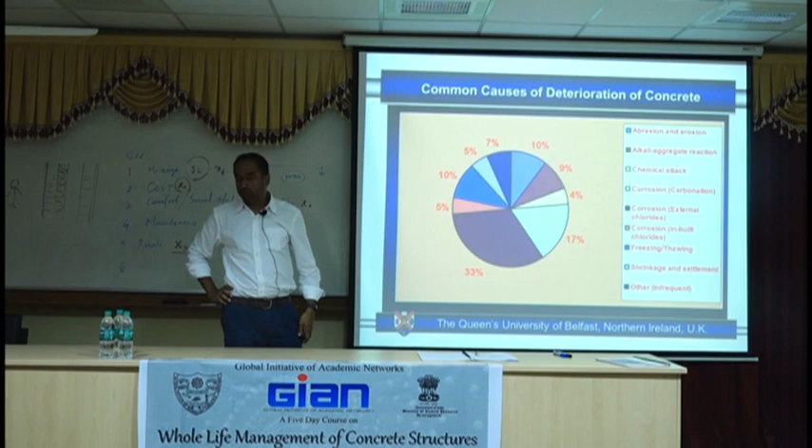Are you familiar that in the past calcium chloride was used as an inhibitor, as an accelerator? It's not an issue on its own, but it becomes an issue if you have water. If water comes in, then the equation will change.

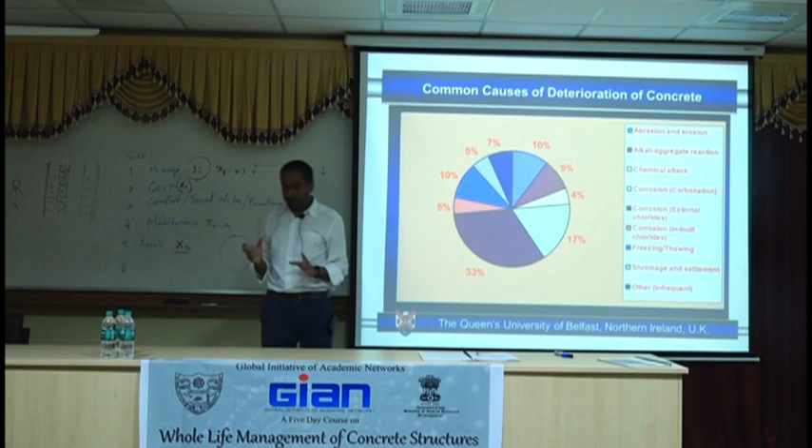And you have freeze thaw and all of the other shrinkage and material related properties. So this is for UK as a whole. Northern Ireland is a bit more straightforward.

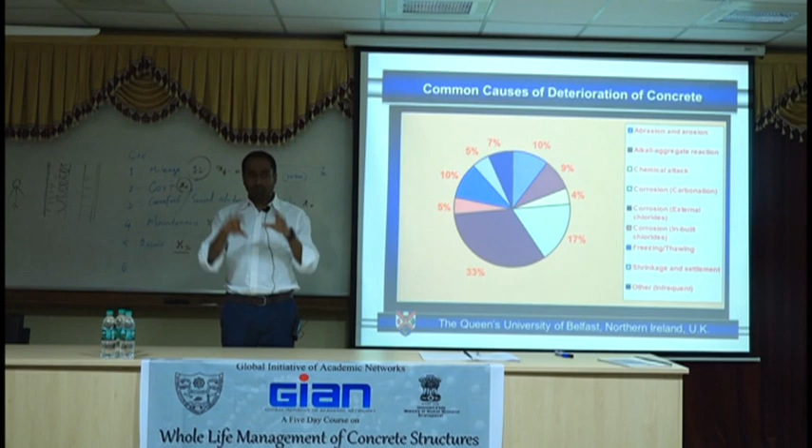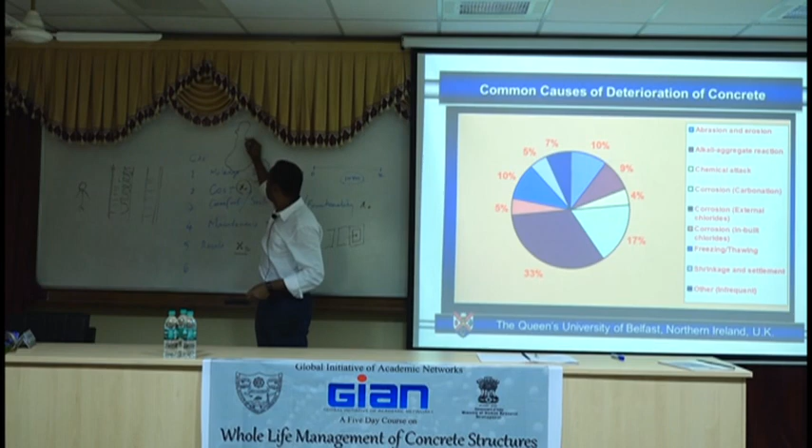We're the largest concrete producers in the UK. We make more concrete, 80% of the concrete. Have you seen Northern Ireland as a map? My map skills are... this is UK, that's Scotland, and this is Wales. So Ireland is about that size, and Northern Ireland is about that much. It's very small, actually much smaller than Scotland even.

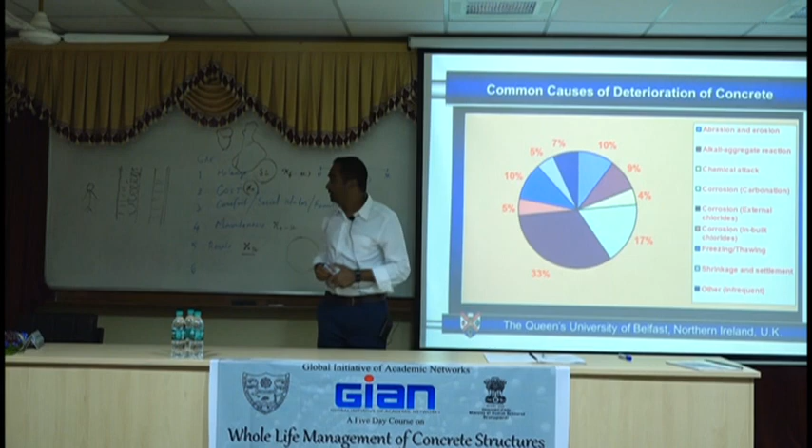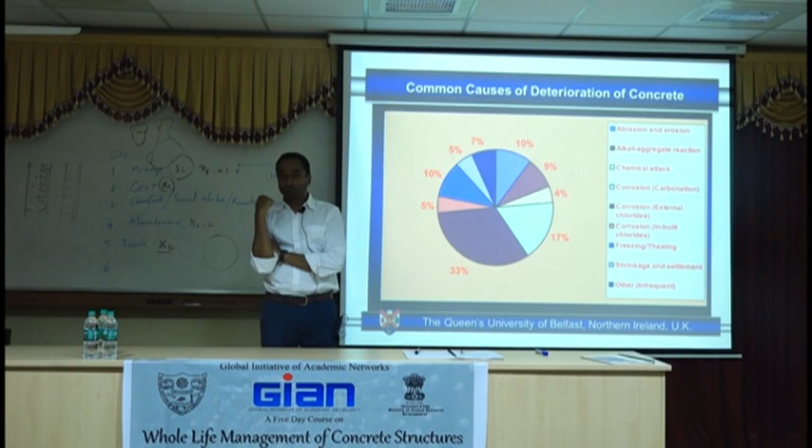For that island nation, we produce 80% of UK's concrete. We make it, we ship it across the UK, and it's still cheaper for us to deliver to London than somebody who lives 100 kilometers from London. That's a different economics, okay?

Part of the reason we make good concrete is we have very good quality aggregates. Most of the cement producers in Europe are based in Ireland. Most of the European cements are owned by Irish Cement Association. They control the market, which means we can produce a lot of cement.

So for Northern Ireland, the issue is different. Quality of aggregate and quality of construction means majority of our structures, 80% of our structures, chlorides are the only issue. Chlorides are really a big issue for us. So this course will look at chlorides and carbonation because I presume that's very common here.

Is carbonation a big issue here? It'll be a very big issue closer to the industrial zones or more industrialized cities. I'm sure it's an issue in Bangalore anyway.

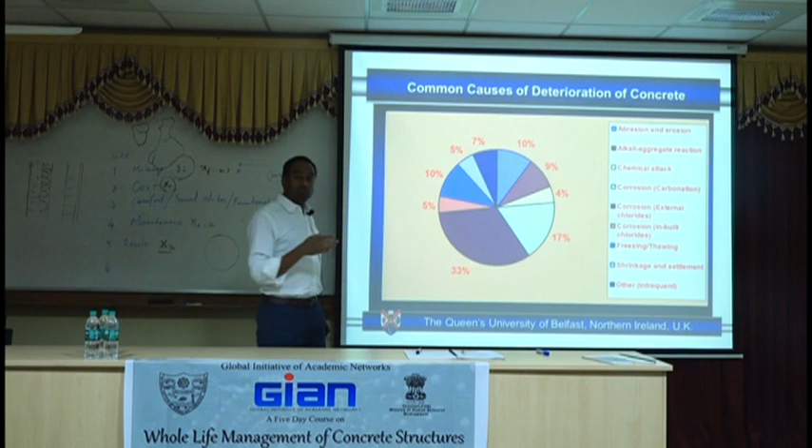So let's then focus more on carbonation and chlorides, because if you look at climate change, I think one of the primary things that will change is the CO2 concentration. And it has a direct effect on the structures. Some of it is good, some of it is not good, so we'll look at that.

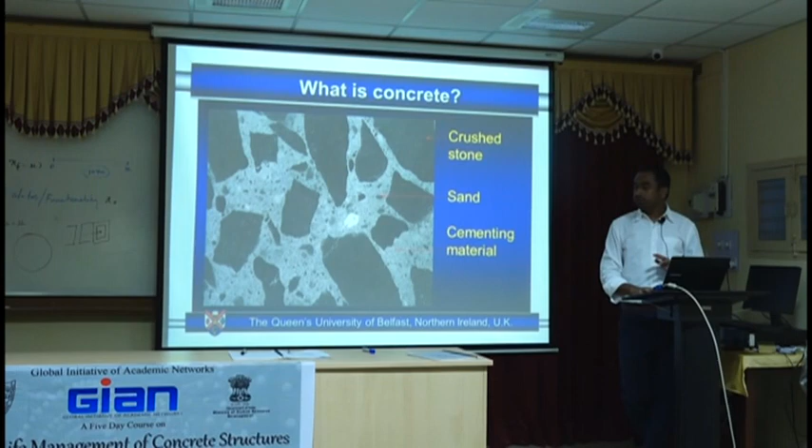So that gives you a breakdown of where we focus our effort. And I have some slides on the concrete. Given that most of you are quite familiar with concrete, I don't really need to spend much time, so I don't intend to.

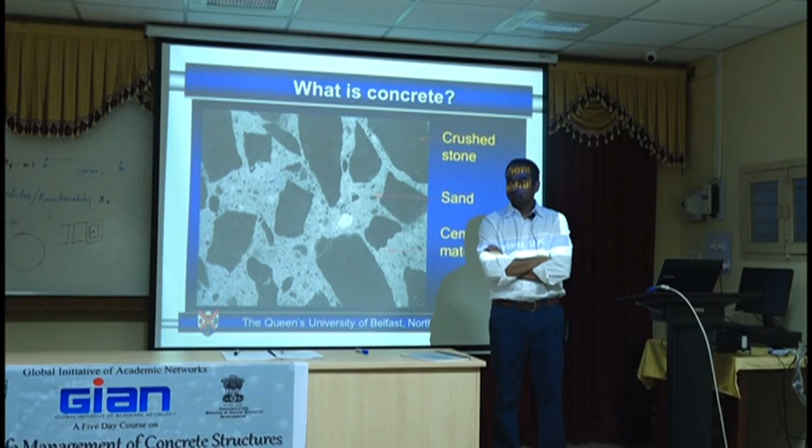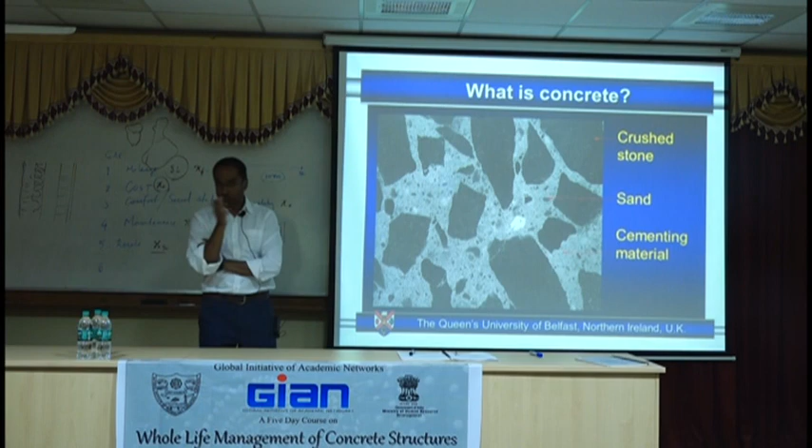Anybody can make concrete, am I right? Anybody can make concrete, all you need is a mixer, okay? And that's part of the problem, that everybody can make concrete. Cement is so hydraulic that you just add water to it and throw some stones. Concrete, it's not really difficult. It shouldn't be, it's an easy material. For a general purpose, concrete should be the case, but not for structural concrete, not for concrete that's designed to last.

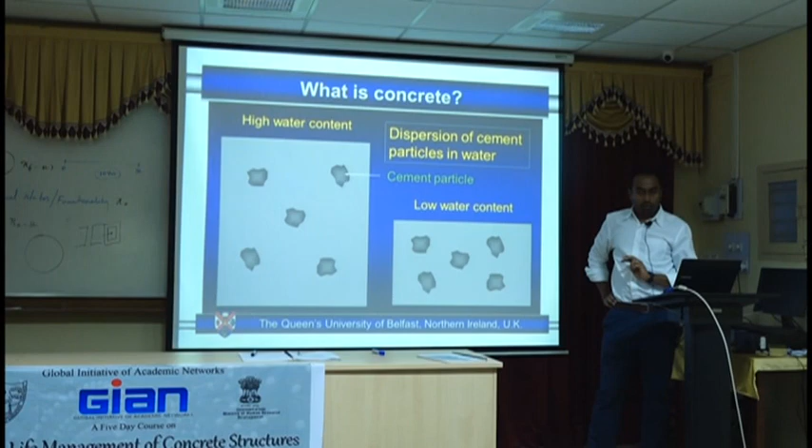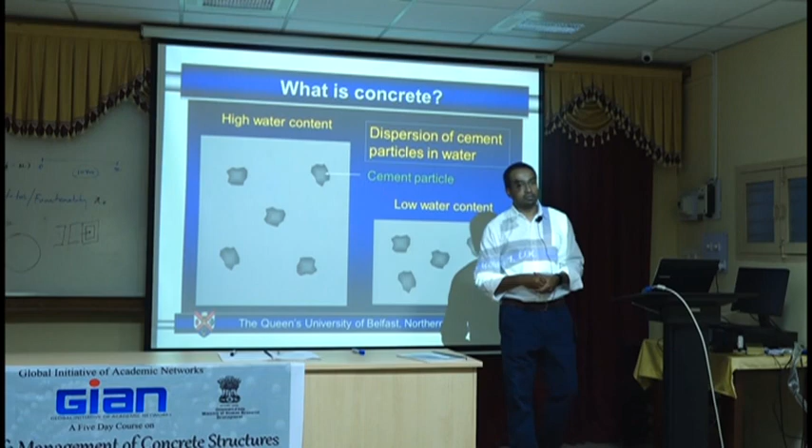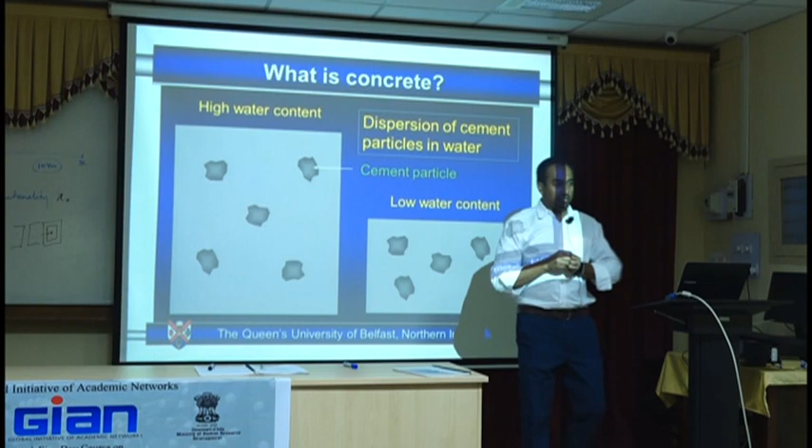Through this slide, what I'm trying to say is the effective water binder ratio. So if you have the same amount of cement particle in an area and you increase the water, i.e. you have a higher water binder ratio concrete, it disperses itself. That's the only way you can manage. These are charged particles. Cement is charged particles, which means they'll tend to disperse, which means the network will be very loose. So anything that's looking to come from outside, it's much easier for it to come from outside.

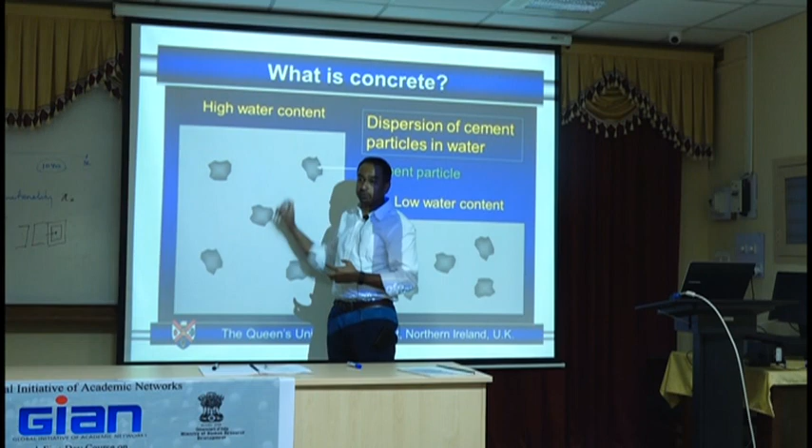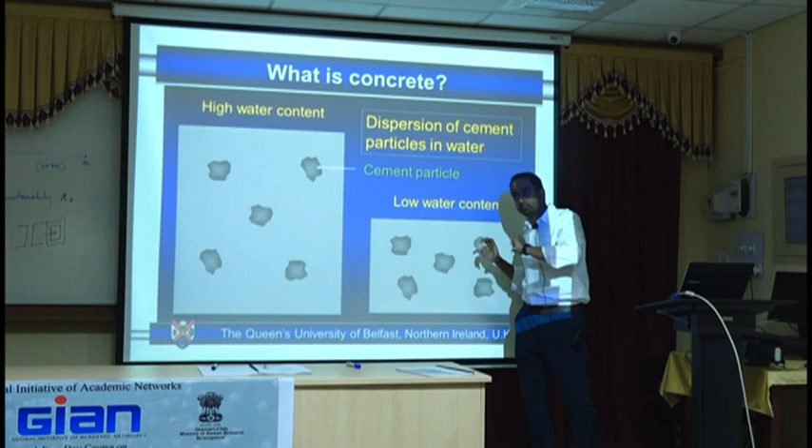Most of the things that are coming from outside, whether it's water, chlorides, carbon dioxide, sulfate, or whatever, they are charged particles. So the further apart the charged particles are, it's easier for them to come in. Closer the charged particles are, harder for them to come in. It's not just the gap, it's how much force these things can exert, whether that's chlorides or carbon dioxide. So it's a very simple equation.

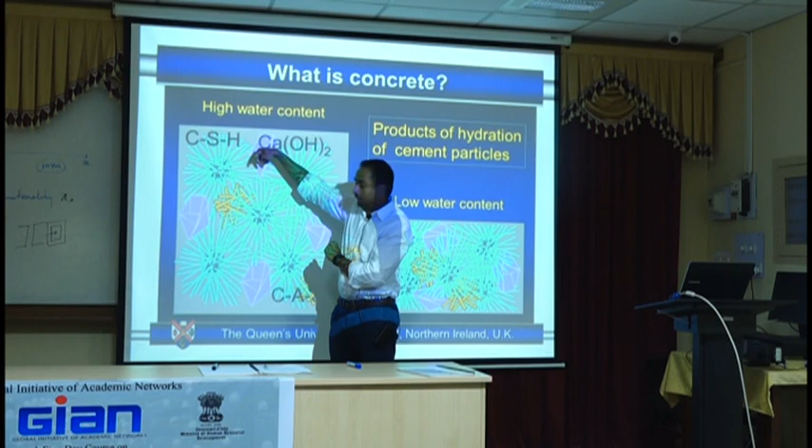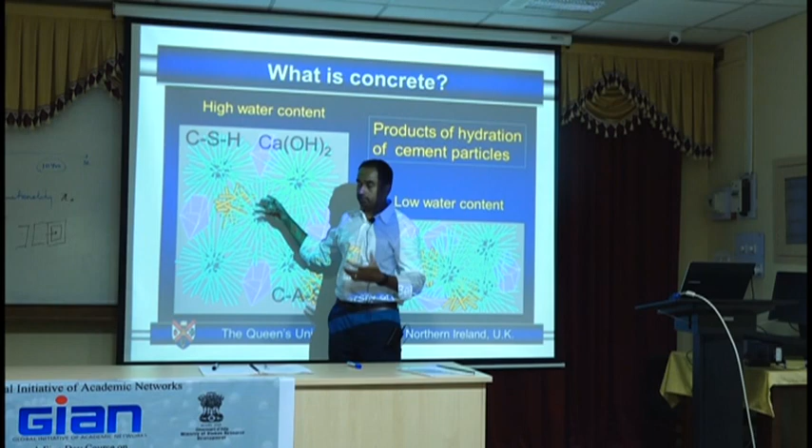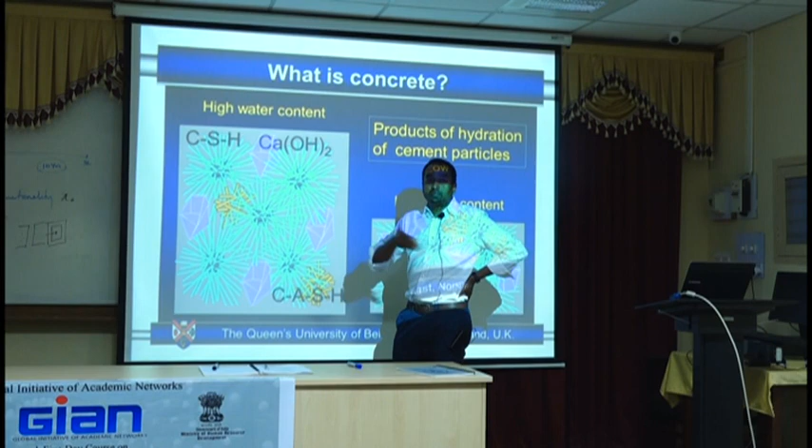This is why when you look at, I think even in the Indian standards, it's very strict on, am I right in saying the Indian standards are strict on water content or water binder ratio? For structural concrete, does it say the water binder ratio shall be less than a certain value? Okay, that's the reason why they're saying it.

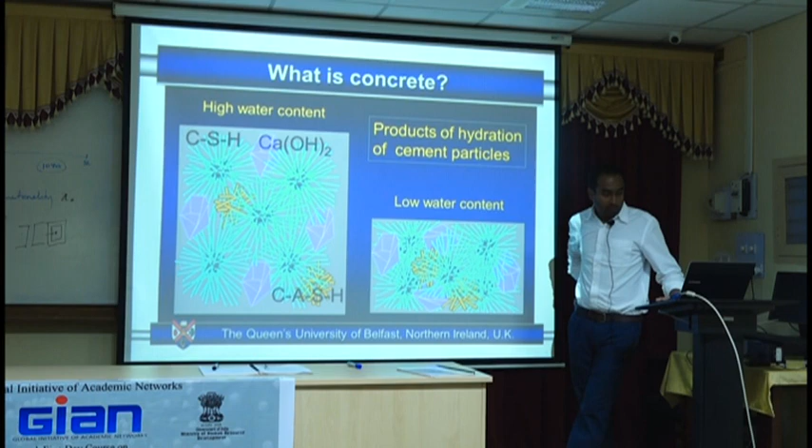So we're going to be battling with some of these guys later on. Calcium silicate hydrate, your structural part of cement. Calcium aluminate hydrate, which is the part that you love if you're working in the industry - that's the faster reacting stuff. It's great from a durability perspective, and this is good for durability as well. But a lot of that means it's not really good, so there has to be a balance between them. This kind of technology is well known for the cement industry - they can make it, reverse engineer it, make it whichever way they want to have a desired property.

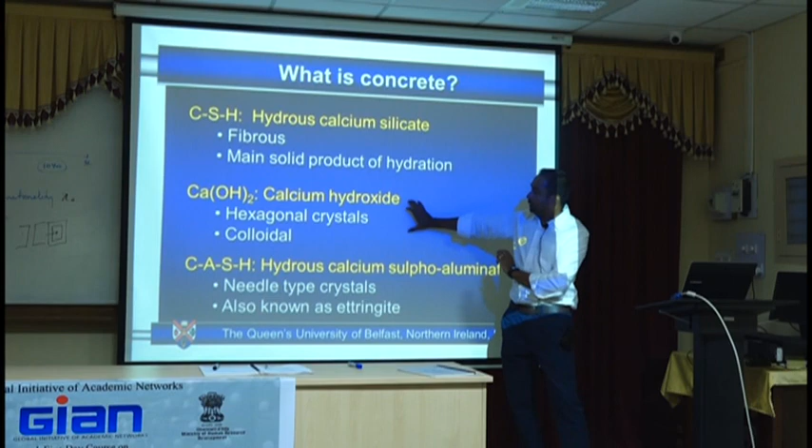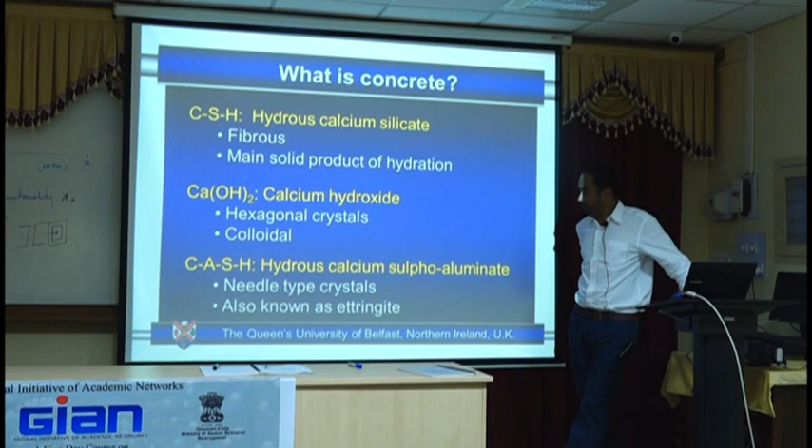And this is a critical member, quite often overlooked, but that's your defense system for chlorides as well as for carbonation. Okay? Happy enough? Okay.

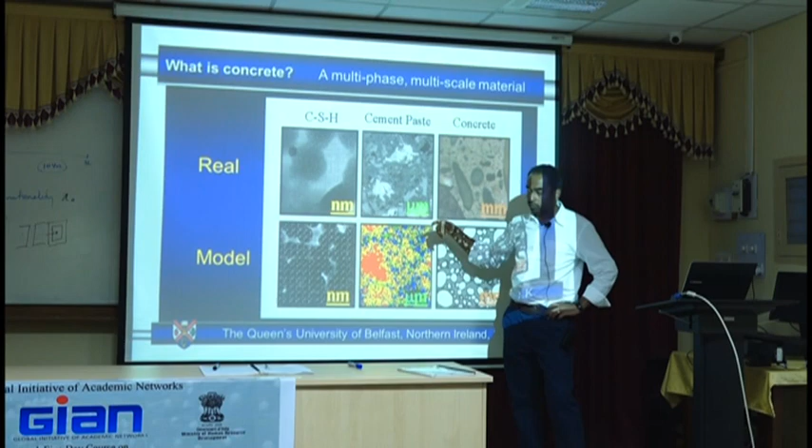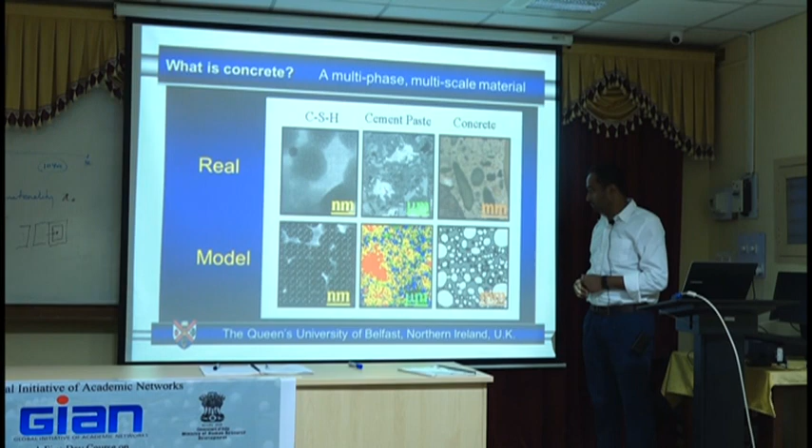You can use a microscope. Majority of you are researchers, and you know that you can look at concrete in different layers. If you look at millimeter layers, you can physically see it. Micrometer, you probably need an optical microscope or below, and nanometer you need much more sophisticated tools. But in the same way you can look at it, you can also build them back. If you look at NIST or TU Delft, they have microstructure models which you can put everything back, but it's not generated from that, it's more theoretical, and they're too far away from millimeters.

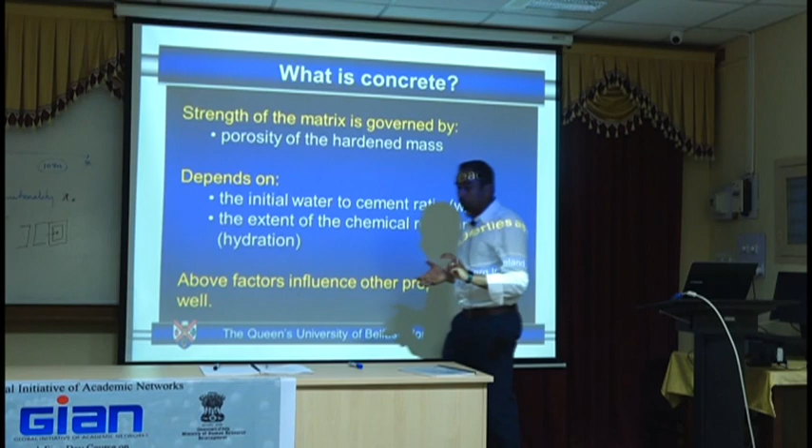So the strength of concrete is provided by aggregates. Am I right?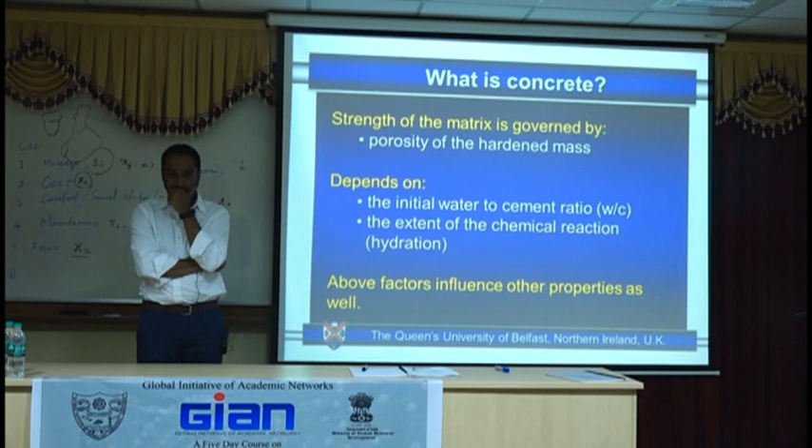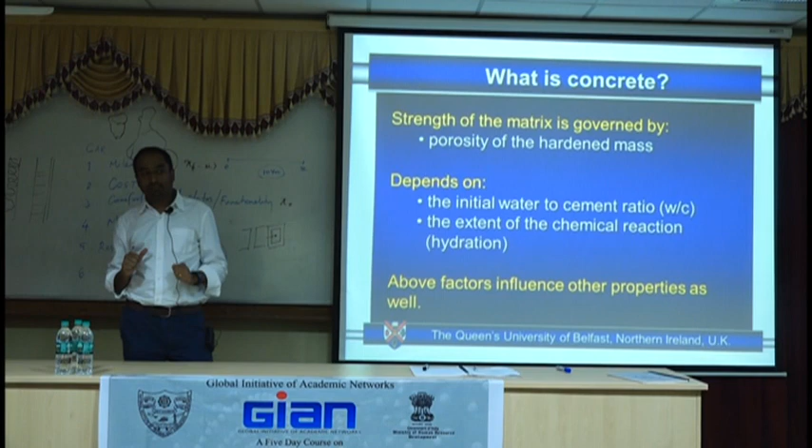If I have a pack of aggregate and I'm confining them from expanding, can I get similar strength as concrete? My question is very deliberate and very much controversial.

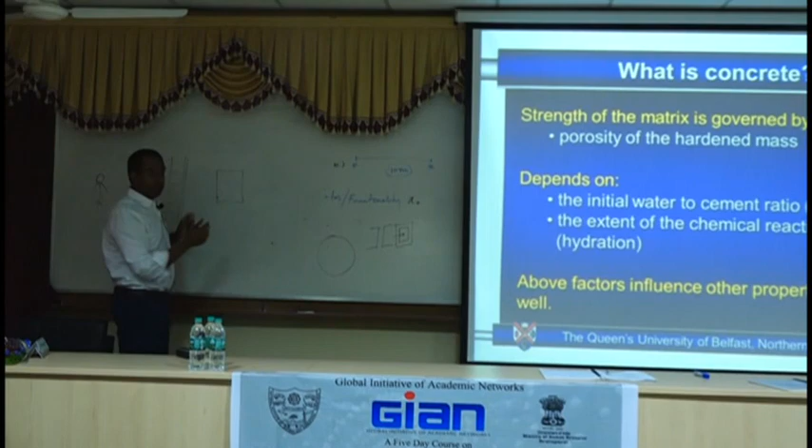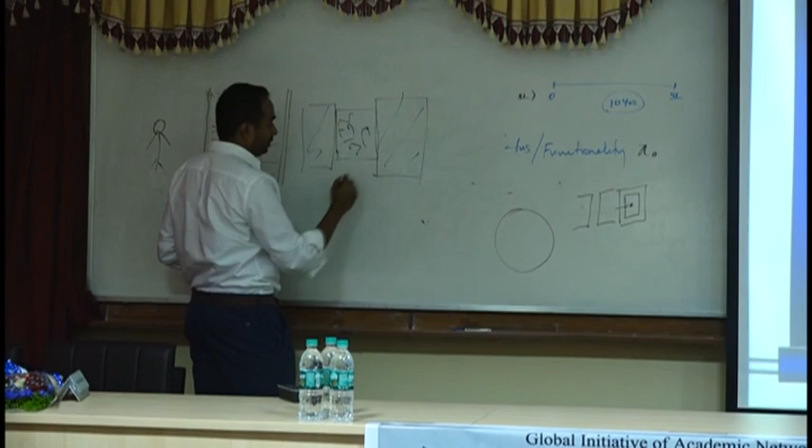So I'm taking a box which is steel cladded. It's solid steel here, solid steel here. I have a pack of aggregates here, and I have another pack here which is concrete. There's only aggregate in here, okay? It's well compacted. So my question is, can I get comparable strength as concrete with that?

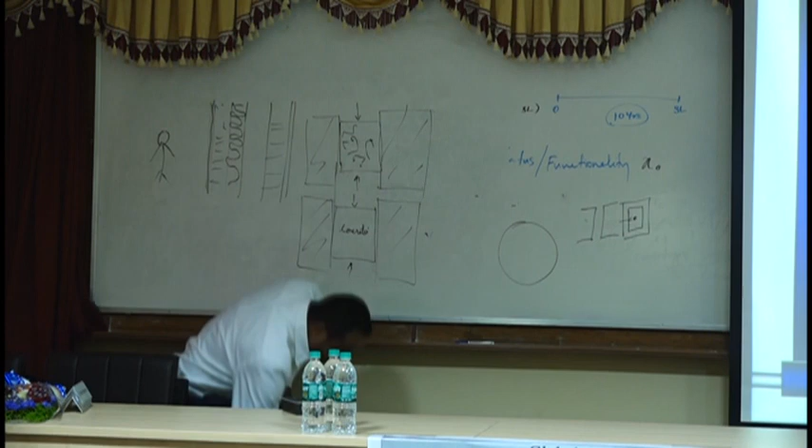Anybody from a geotechnics background? Well, you're all geotechnical persons anyway, you would have learned it. So there's no lateral expansion allowed, it's confined. Can I get it then? So it's confined, I'm confining it - can I get the strength?

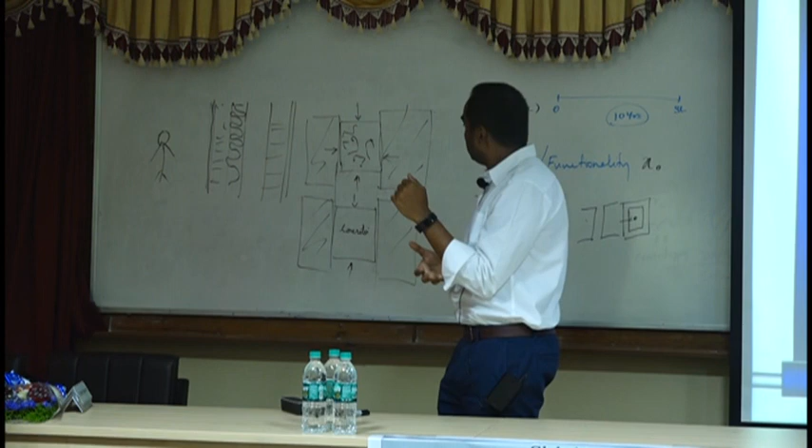How many of you think I can get closer to it but not exactly? Closer? No? Have you tried it? If you confine it, you can get closer to it. I'm not in any way saying you will get anywhere near it, but you get closer to it. Part of the reason is, and depending on the stone clearly - if you're using good quality basalt or quartz stone, and it can transfer the load effectively, and you've compacted it quite well, you're then testing the stone if you confine it. Except the slippage of the stones will then determine its failure.

And that's what we expect the concrete to do. You can't confine the concrete forever, so we're expecting an internal confinement from within concrete. So what is the job of my cement? Is it to confine the aggregates and keep it in place?

We know concrete is very good in compression. Is concrete good in shear? I did ask the structural engineers - so we design the steel quite often assuming the shear is carried by steel. Whether you use a strut and tie method or any other method, you design the steel for taking the shear, which means we're sparing the concrete from taking the shear strength.

So the only job of concrete therefore is just to provide the compression stress on the top of the beam if it's in flexure, and to keep the aggregate in place structurally. But durability-wise, it has another function - it is trying to keep the steel protected and trying to keep the steel in place. Those two things are important, because if you look at the top and bottom steel of a reinforced beam, you do need them to be at a set distance. Ideally, you prefer them to be further away - you get the largest lever arm, you get the best bending moment. But that comes with the consequence, either the beam is too big or the cover is too low. But you want them to be in a set position.

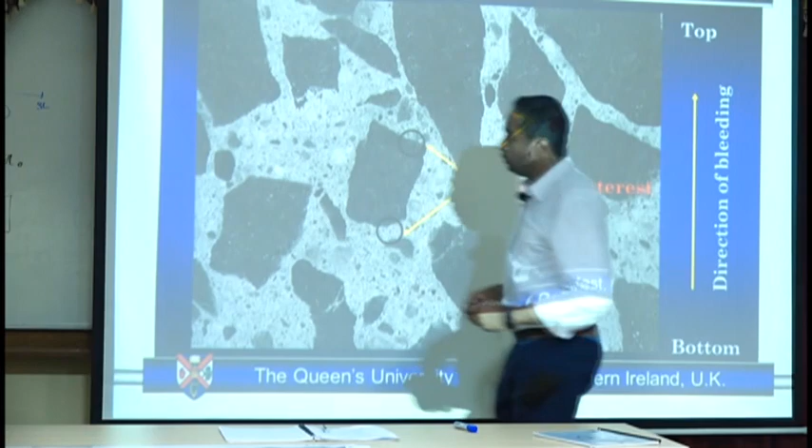So these are the functions of your cement - it's meant to do all of this, and it has the chemical nature to do all that it needs to do. But what we need to do is redesign it so that it can do these jobs and more. Okay.

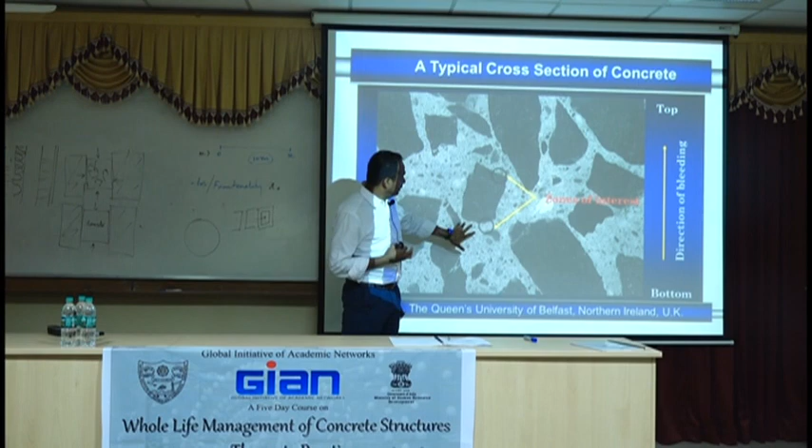The typical issues that you can expect in concrete are around the aggregates. This is very critical, and it's why I started with that, because if you have the aggregates interlocking and then pour the cement slurry into it, you can make really good concrete. There's a lot of people working on that kind of theory, minimum cement theories and all.

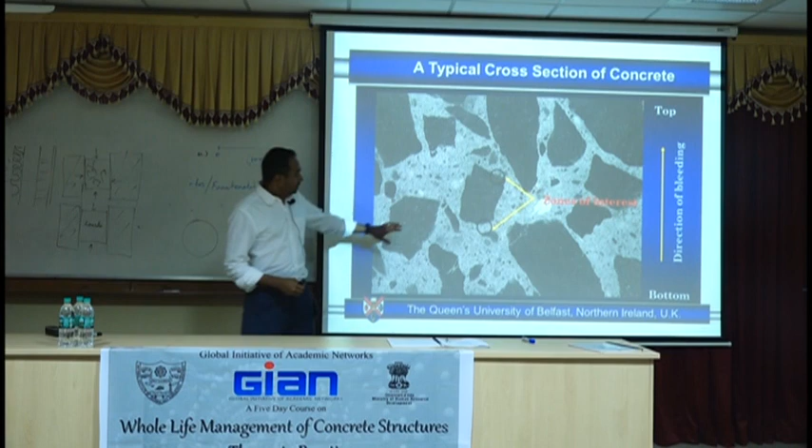But concrete is essentially not that way. We make the concrete flow these days, like self-compacting or self-flowing concrete. It's a requirement for certain structures, because the steel might be too complex otherwise. In the UK, precast production, now 80% of the precast is self-compacting, because you don't need vibration, great.

The UK requirement for concrete is that it has to shine, the surface has to shine. So self-compacting is the only way. They make a metal mold, reverse the mold, pump the concrete in, and they might have vibration systems on the top, or the whole bed can vibrate. But when you lift the mold away, the surface concrete will look like glass, essentially. Quite often the architects might say it needs to shine and have that color, and they might even give a piece of paper and say it needs to have that exact color.

For those working in concrete, this is incredible, because the aggregates play a part in the color, which means you have to change the aggregates. I've learned of cases where they bring the aggregates from China to do the concreting. Imagine the distance, but they have to do it to get that exact color. Clearly they make money, otherwise they wouldn't do it. But it is an incredible art.

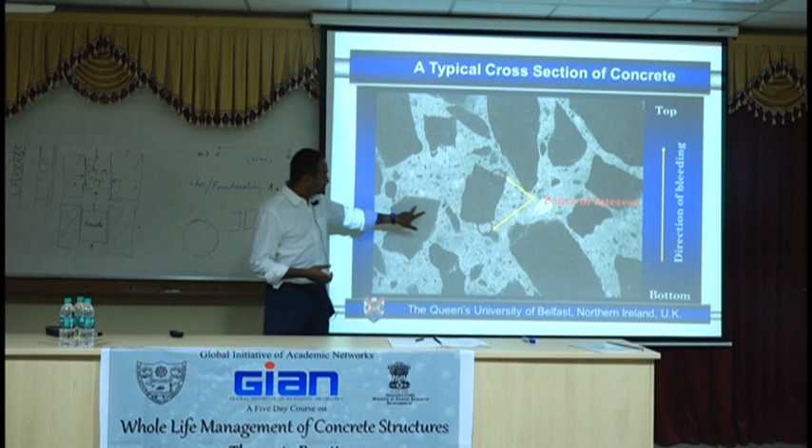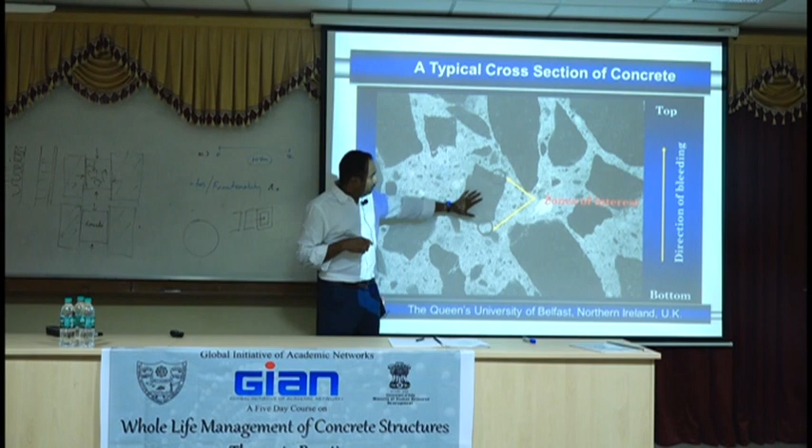Coming back to it, in terms of durability, this is a very important zone for us, because that interlock provides connectivity between these aggregates and keeps them in place, which is our structural capacity. In terms of durability, that is a fully formed aggregate now put in place into a new material, so that interface needs to be solid. If it is not, then it's just a conduit for things to flow.

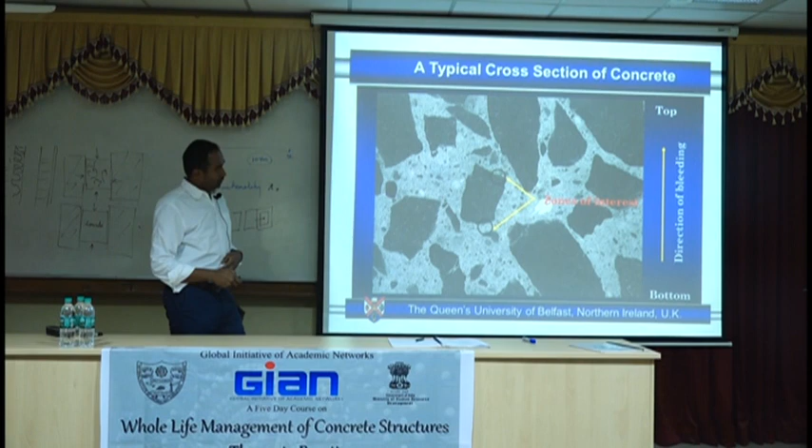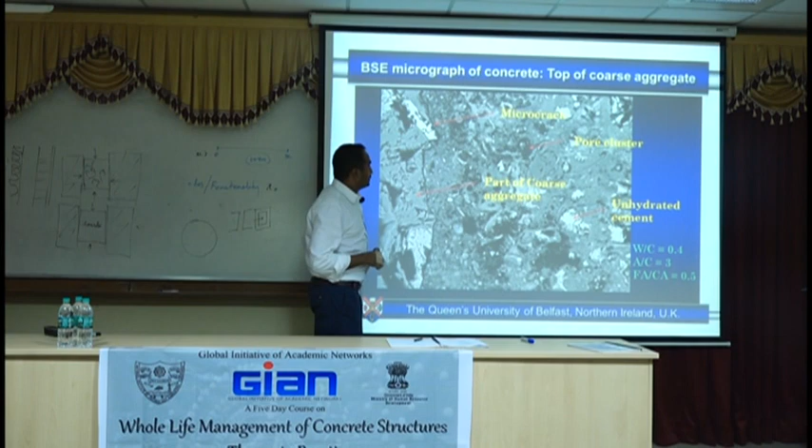Looking down in a backscattered electron microscope image, that is your aggregate, much more enlarged. These kinds of techniques allow you to go further and further down to look at the bigger picture. So this is your stone, which is typically 10, 20 mil, and you can see micro cracks around it. That's due to differential shrinkage of the cement system, but the aggregate just remains in place. That difference in movement when curing can cause micro cracks. Stresses can cause micro cracks. The aggregate itself can be reactive and cause micro cracks. And everything else is a pore structure.

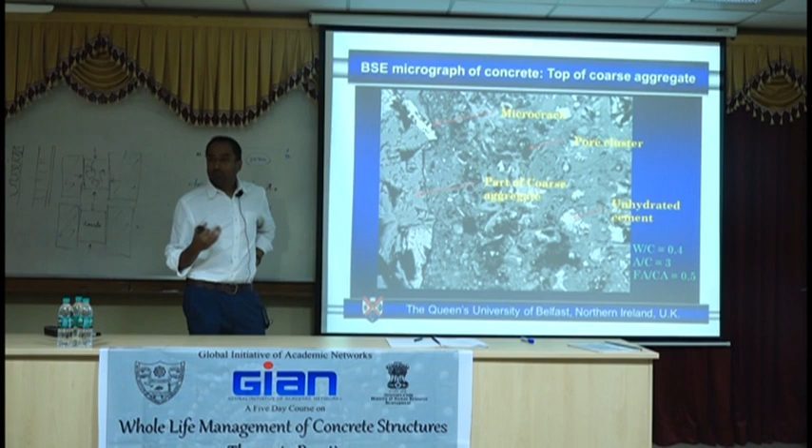It's quite a difficult diagram to figure out when you look at the image initially, and that's where the medical technology is so advanced - I'll show you in a minute. You can color it. The software is so advanced that, in the CT scan system, it's very similar - you can give a color to a particular feature and highlight it, which means you can say all of these reds are your pore network, whether due to microcracks or whether they were already there.

Which means if I put water here, it can quite easily move down - well, quite easily is just an exaggeration, it's not that easy for it to move. Remember, they're all charged particles, so it's not easy for even water to move that fast. But it's in the order of 10 to the power minus 8 to 10 to the power minus 12. So it's quite low, but it's enough, because over 100 years, these will go really fast.

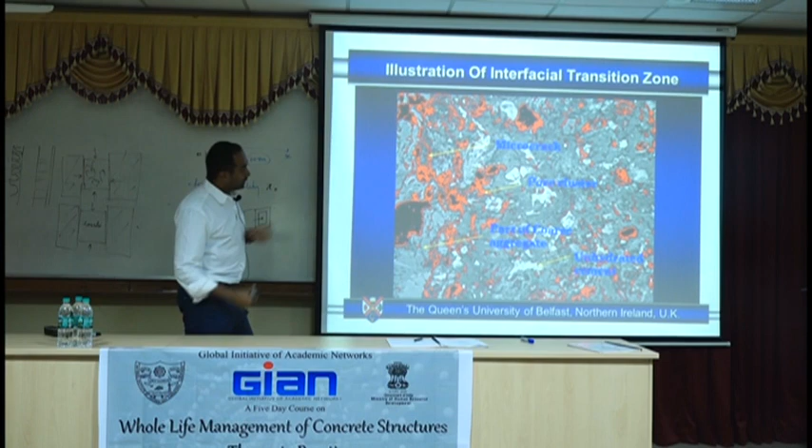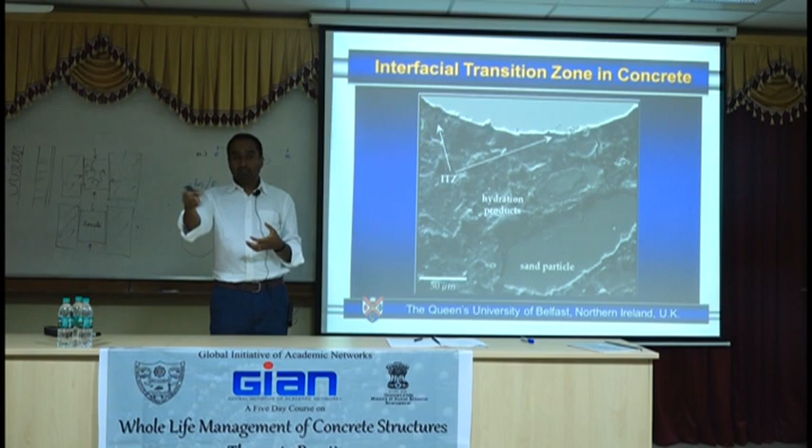That's your aggregate, and this is your interfacial zone. If the aggregate is expansive in any way, that zone will be filled by reaction products which are much weaker, and then there's no interlock anymore. They also produce a layer of very weak material where things can flow. So this is the story of our concrete.

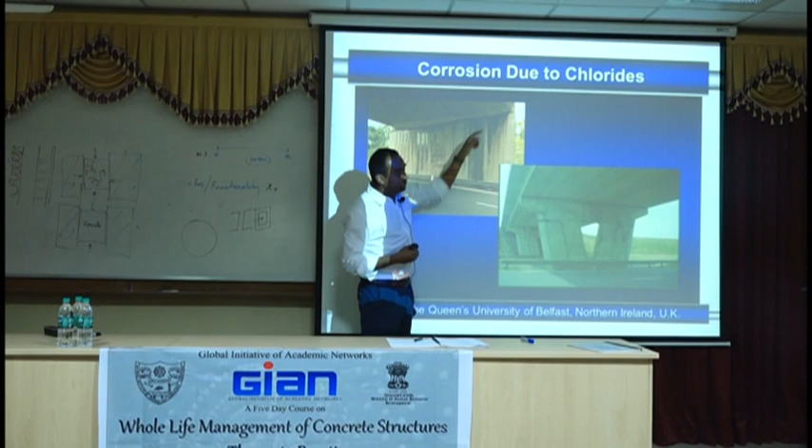This is not a cross-section of our structures in Northern Ireland, but it's not too far from it. All the de-icing salt used on the road above has come through the expansion joint, quite nicely placed on top of a pier. It's very easy to put the expansion joint there, because the deck has just been put in place - there's a gap there, and you have two solid legs below it. Much easier to put it there, but extremely difficult to maintain that kind of structure, because the water will go in, through the crack, through the expansion joint. It has to go somewhere, so it goes on either side of the pier, and this water has a lot of salt in it.

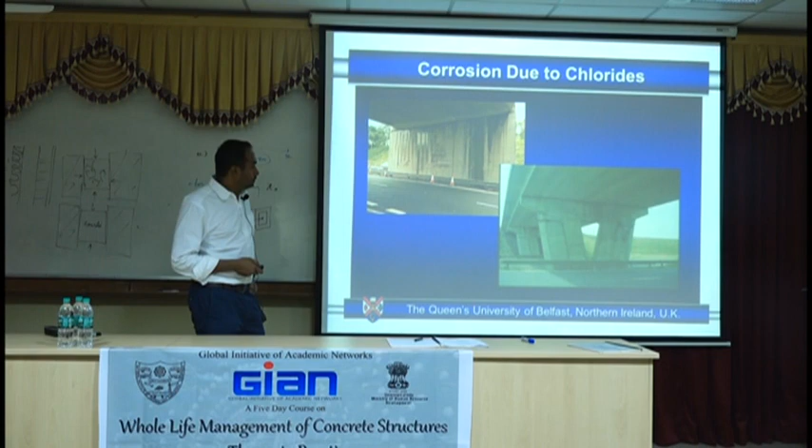The net result, you can see the water there, and you can see the patch - the patch is whatever corroded away, but the rest is corroding anyway. In addition to that...